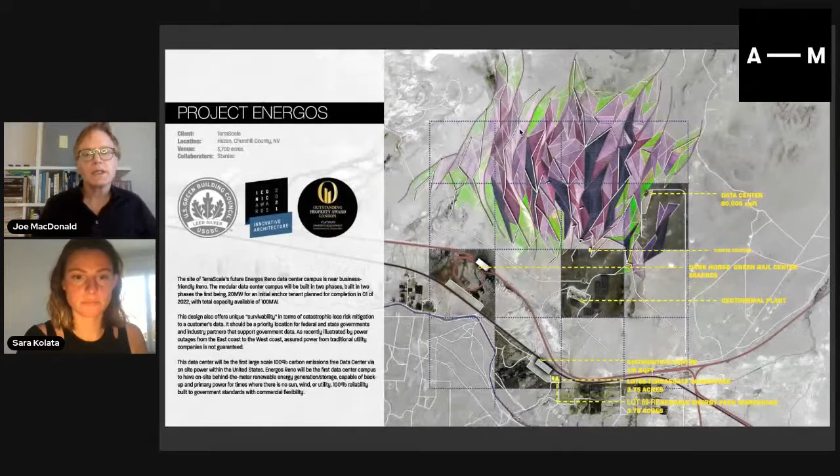So here we're looking at the site. It is in the desert, and there are several components to this project, Project Energos. The client is a clean energy infrastructure team called TerraScale, based in Los Angeles. And this project is about a year old, and it still remains at a concept level. But it's fairly comprehensive in that all of the buildings I'm going to show you are carbon neutral.

Now, one of the buildings, the next slide that I will show you, is a data center, and I can talk a little bit more about that. I just want to identify that this project by TerraScale has won 3 international awards. It won the Opal Award, the Outstanding Property Award in London, Platinum. It won an Iconic Award for Innovation, Sustainability. And just most recently, it won the Novum Award in Helsinki.

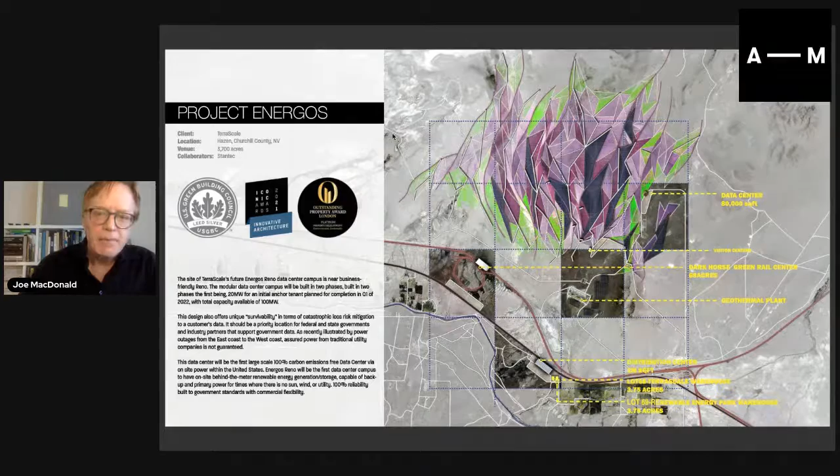So you can see the landscape that we're working with here. The next slide is the data center, and it's actually this building that won the 3 awards.

What you begin to see here on the skin of the building is our research into several different types of concrete, low carbon concrete, aerated concrete, and green walls. You can also see a solar array on the roof.

Now, to get a data center to carbon neutral, there are a few ways to do this. One is hybrid energy. In this case, there's a massive solar array on site combined with geothermal.

Data centers have an intensive water use, and so the use of backup batteries is very helpful. You can also have a wastewater treatment plant on site to recycle the water being used within the data center. The reason data centers are so intensive with their water use is because, of course, they're very hot inside.

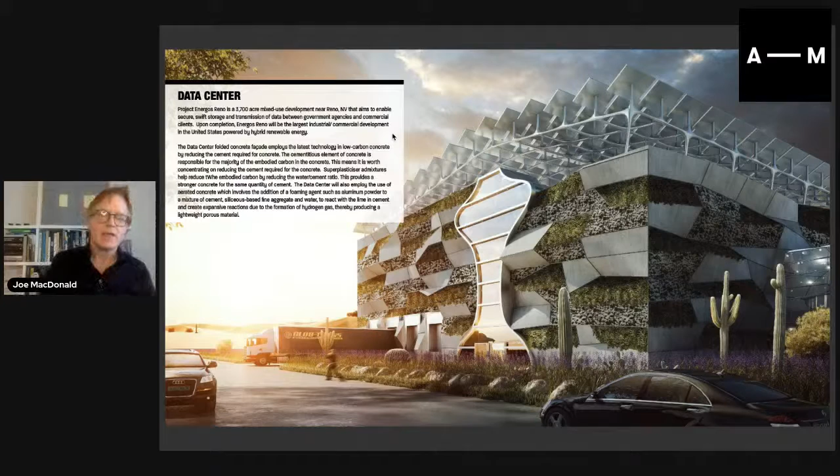They're full of data racks. They need to be air conditioned 24/7. They have redundancy factors and cybersecurity needs. Oftentimes they're built into mountainsides like this one, or completely underground, and most recently they've also been built on floating barges.

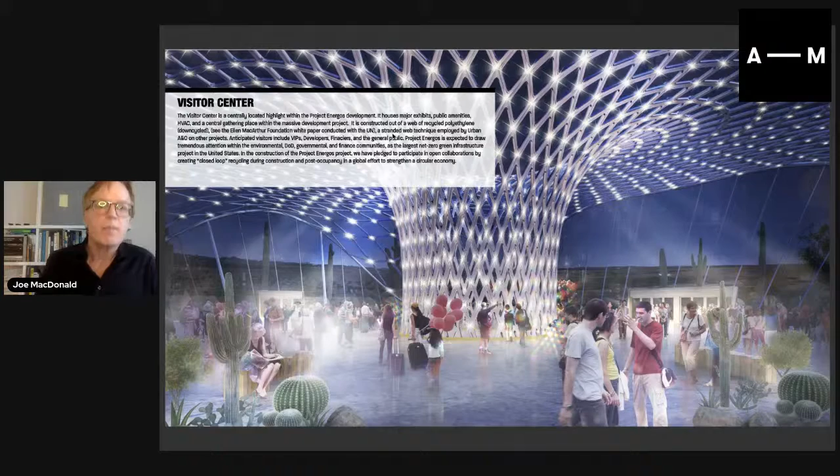Again, part of Project Energos was a series of carbon neutral buildings. In this case, the visitor center is built out of polyethylene.

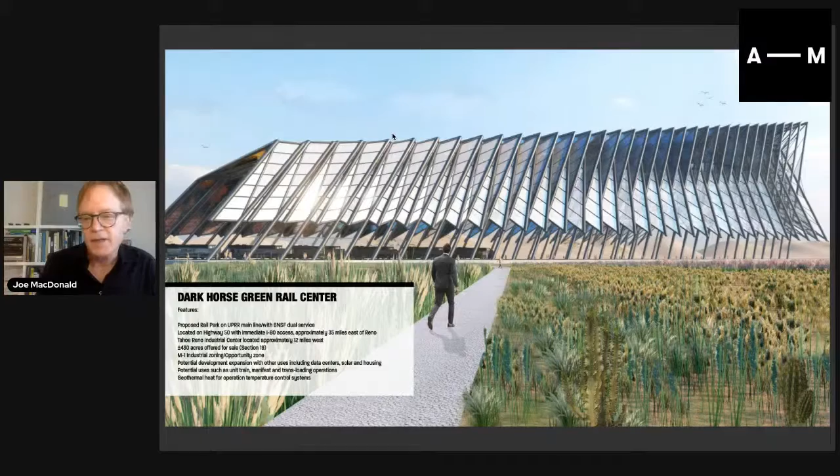On site is also the Dark Horse Rail Center, where goods and services will be brought to the site. It is made out of recycled aluminum.

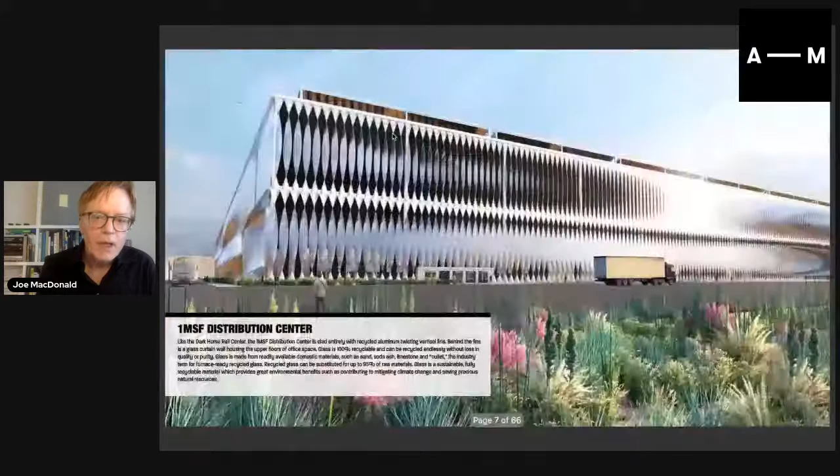And then there's a series of warehouses. Here's a 1 million square foot warehouse.

What we realized during COVID was that companies like Amazon just took off with delivery of goods and services. Forecasters now believe we will never return to conditions prior to COVID. The idea of warehouses is popping up all across America, and they are being used for transit stations for the movement of goods and services across the US.

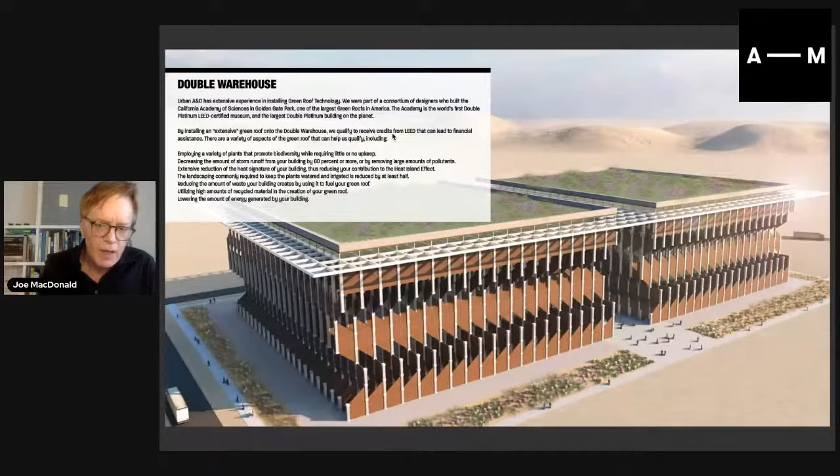This is another warehouse. We call it the double warehouse. It's made out of CLT, cross-laminated timber, which has the strength of steel. And you can see on top of the double warehouse the green roofs.

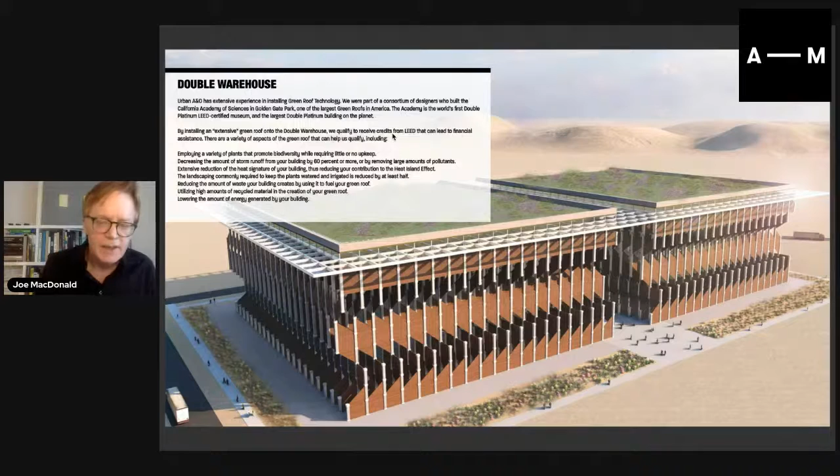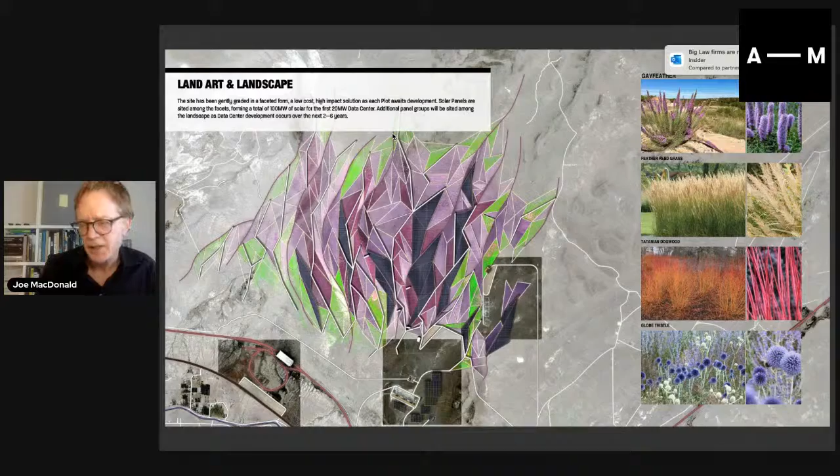We'll go into that a little bit more in the R&D deck. I just want to give you some idea about the design work of Project Energos. This is the last slide, where we also are very much focused on indigenous landscape solutions. So, of course, here we're working with an arid landscape.

And then quickly, we'll just move to the R&D deck. We always start every project with R&D.

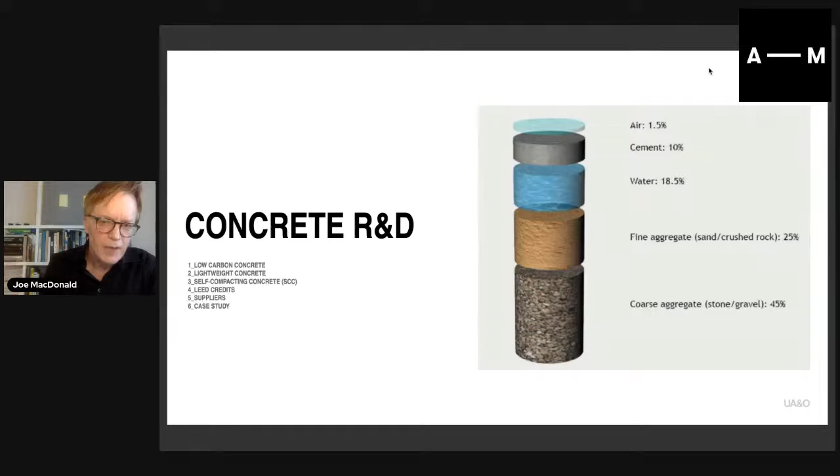For example, when we look at concrete, which is, of course, one of the worst emitters worldwide of carbon dioxide, we're looking for new solutions while still using concrete because of its strength, but trying to reduce the carbon footprint. Here's a great example of how we do that.

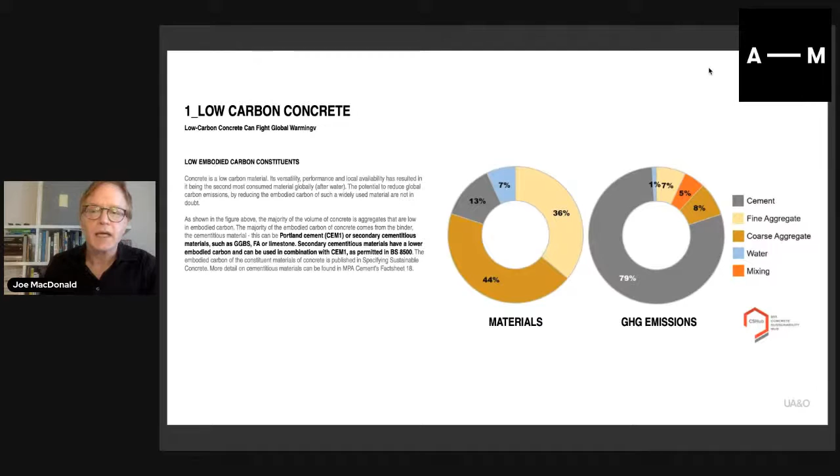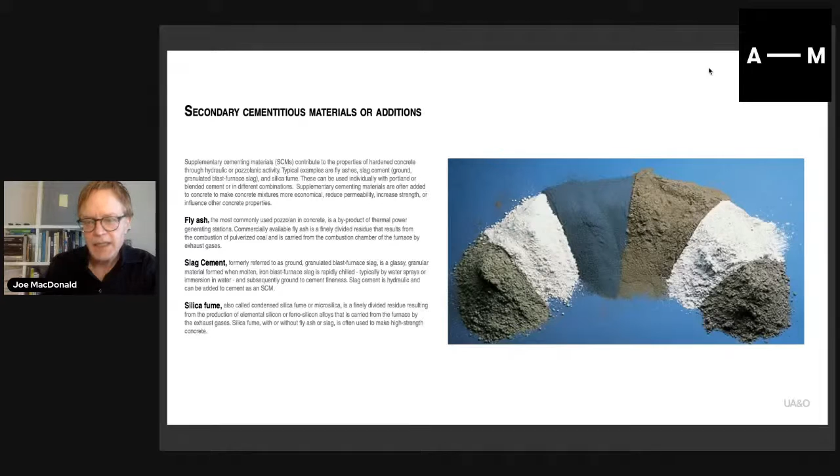We tried to almost eliminate cement from 79% down to 13% within the mix, and we increase agents like fine and coarse aggregates. We're also looking at secondary cementitious materials or additions. These assist in reducing, again, this cement.

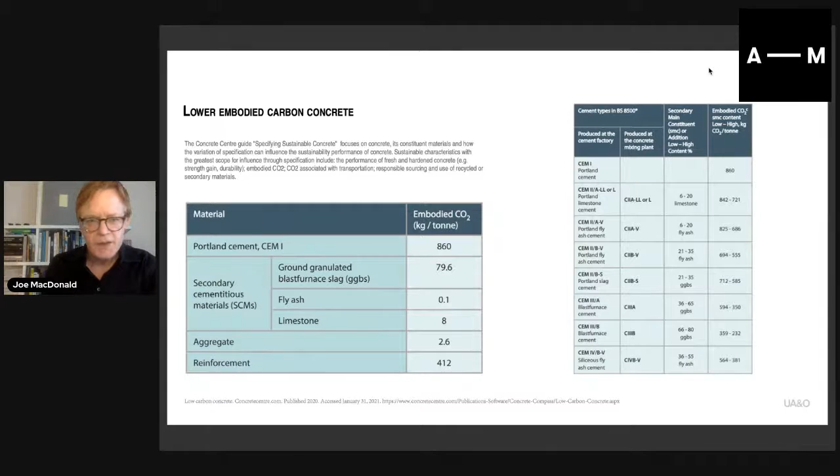And of course, what goes along with all of this are a series of calculations, equations, graphs, charts, and projections. We use various software modeling tools to reduce the carbon footprint of the buildings.

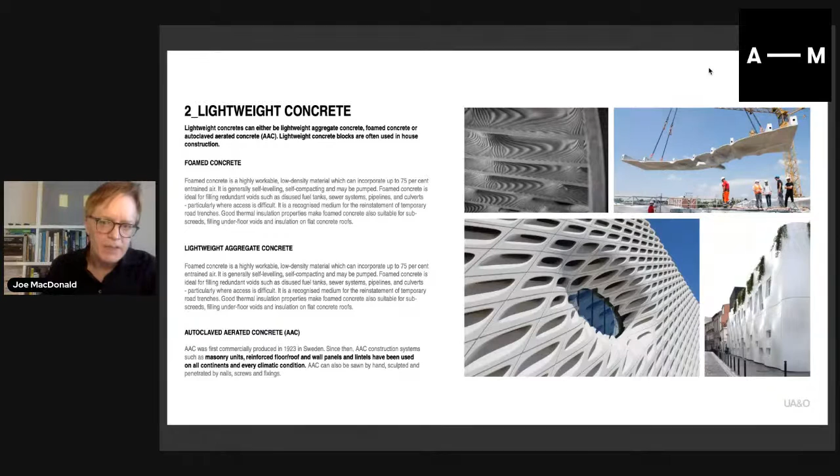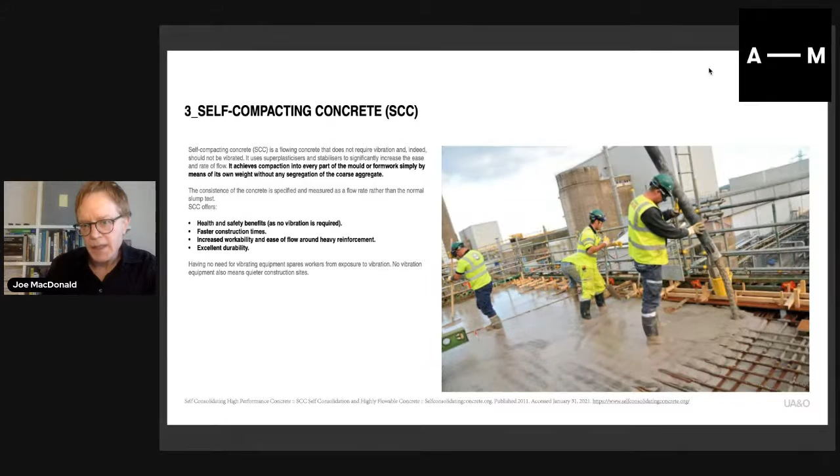On the horizon are some very exciting new materials like lightweight concrete, autoclaved aerated concrete, and self-compacting concrete, which has an intense strength to it.

And then, of course, we are always critically evaluating, yet incorporating, rating agencies such as LEED, BREEAM, and WELL.

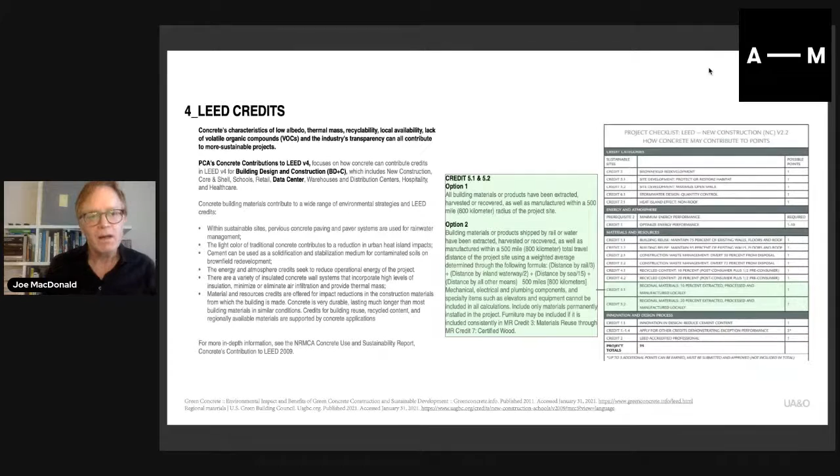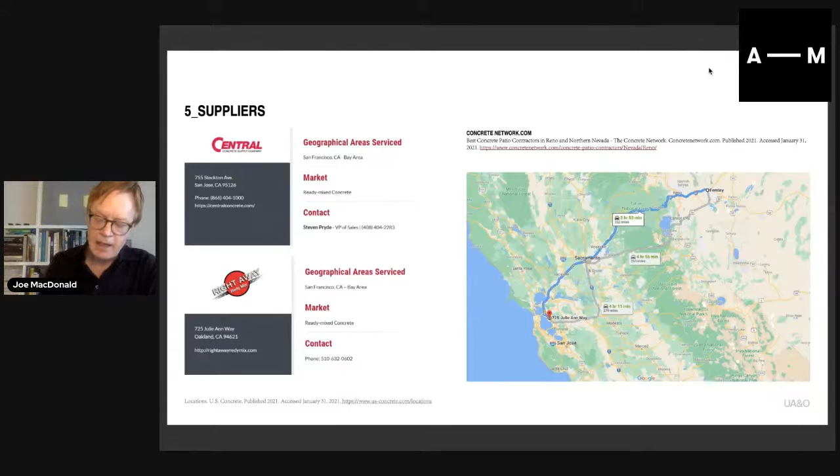For another important point, what you're seeing here relates to that project in Nevada. Sourcing material becomes a big issue. So if you are trucking source material across the country, that is not the solution we're looking for. We're looking for locally sourced materials.

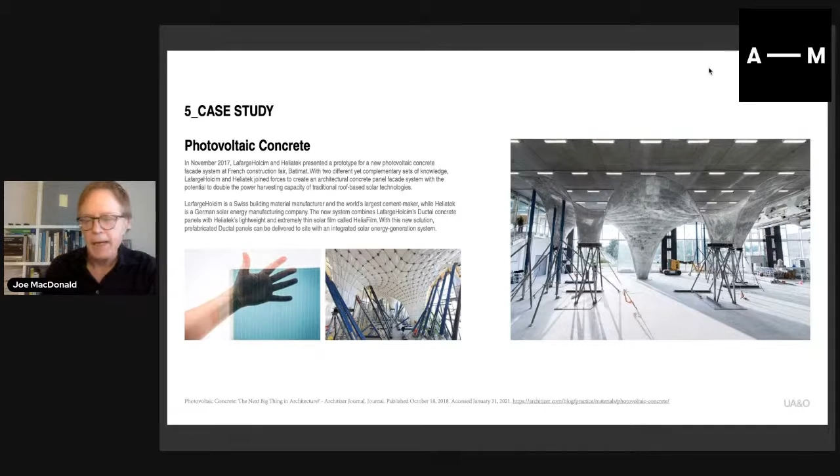This is just one last very experimental product called photovoltaic concrete, still very much within the labs of universities like MIT, still undergoing tests. These are the innovators on the concrete landscape.

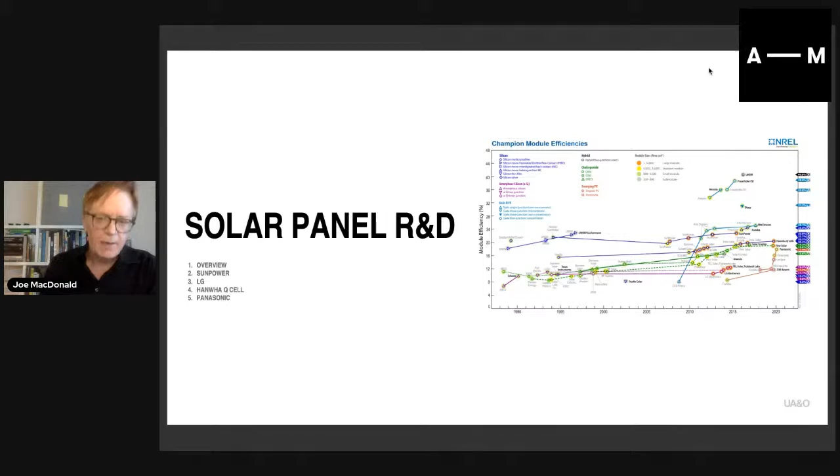And then, of course, solar. We can fly through this, but when we introduce solar into a project, we have to, of course, balance performance with cost.

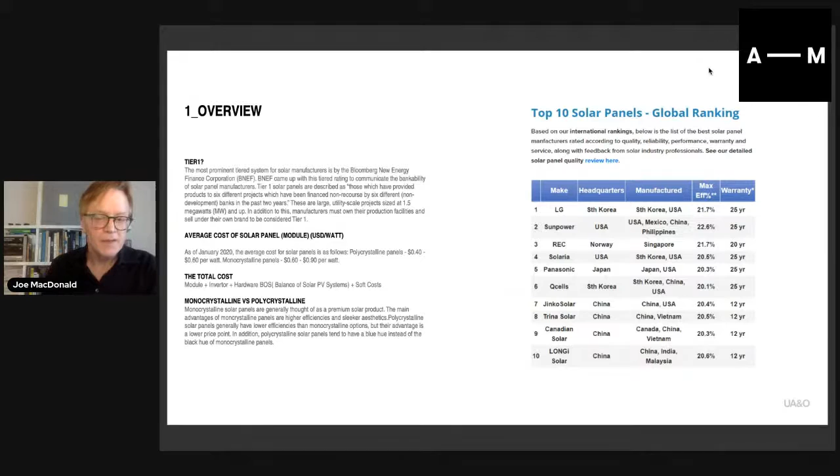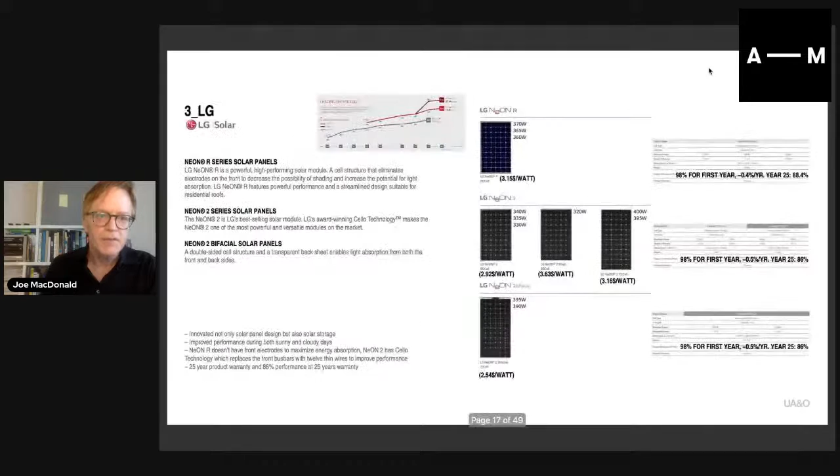This is just an overview of the presentation we made to the client about how we can do that, and then ultimately what we recommend. These are just various manufacturers of solar.

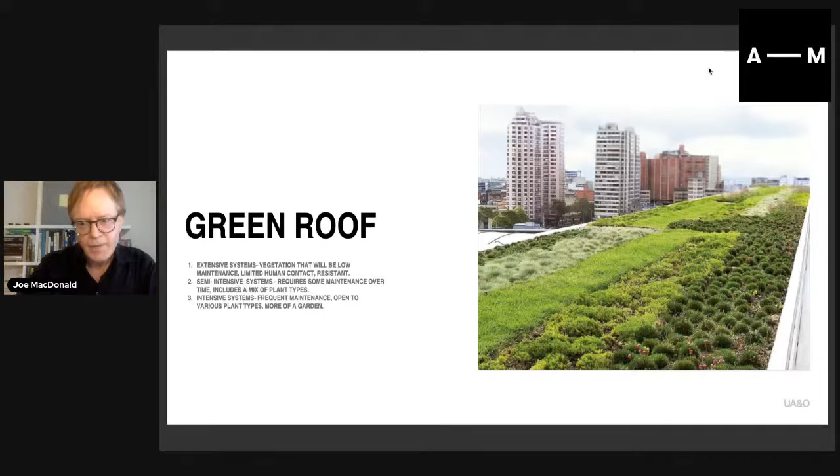When it comes to green roof technology, I was involved with a project, the California Academy of Sciences, under the design directorship of Renzo Piano. California Academy of Sciences has the largest green roof in the world. Cal Academy is also the first and only double platinum LEED building in the world, and that was from 2008.

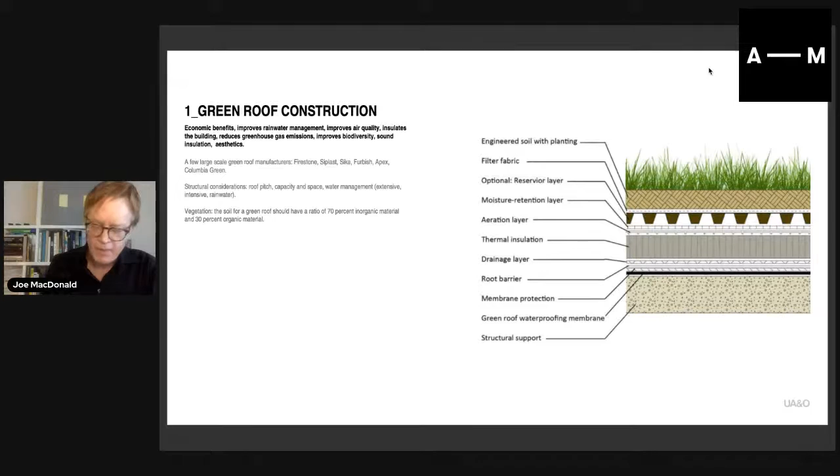I'm going to show you the section of a green roof. There's a common misperception about green roofs: no, you cannot walk on them. The plant material is far too delicate, and the soil depths have to be very shallow because of the weight. These are just some of our construction details, showing how complicated it is to design and build a green roof.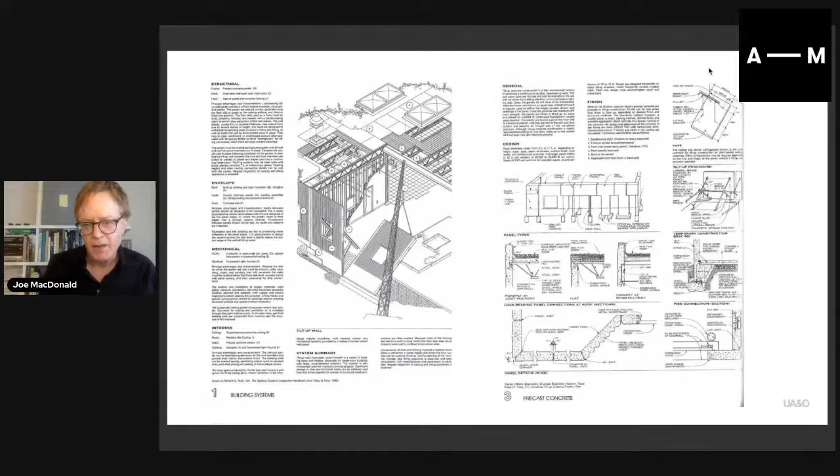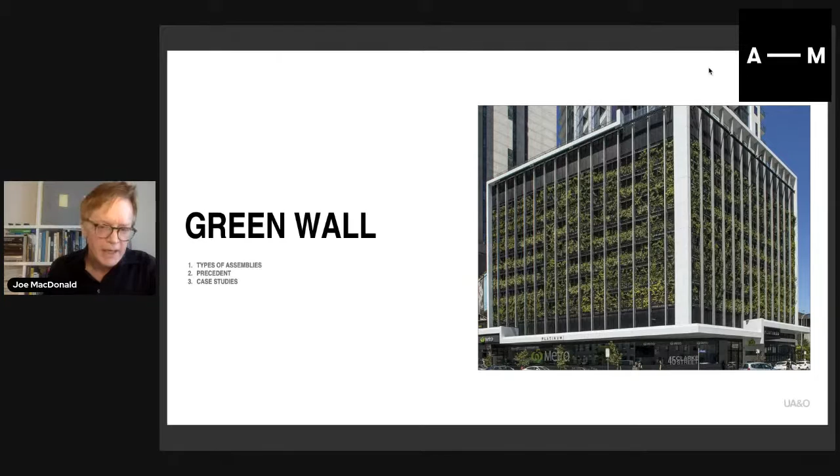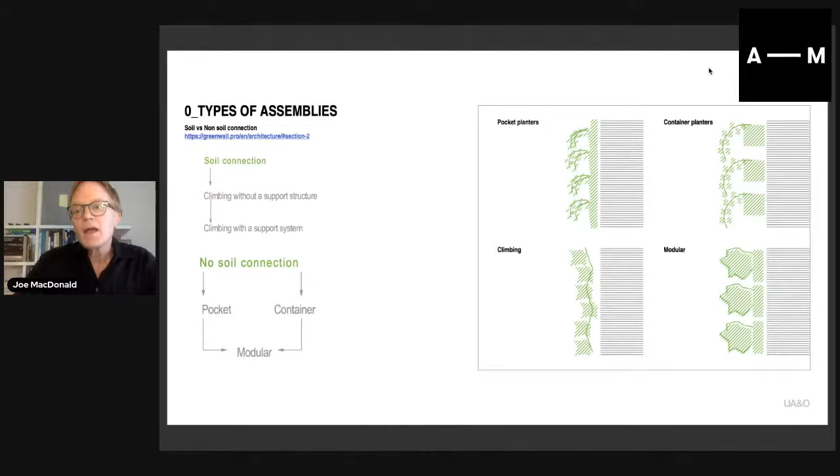And then finally, we go to green walls. I showed you that on the data center we have green wall applications, but there are many types of applications. Here we identify the four main ones: the pocket, climbing, container, and modular. I'll give you examples of all of them.

So here's a modular system. Of course, the maintenance occurs on the outside of the building through a forklift.

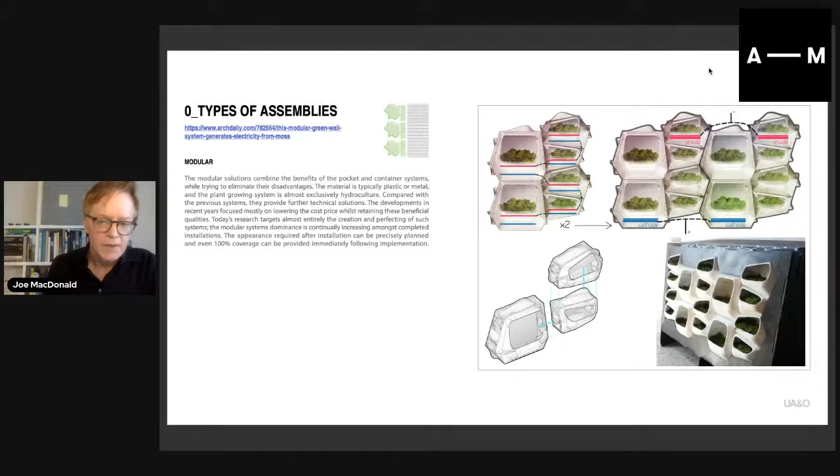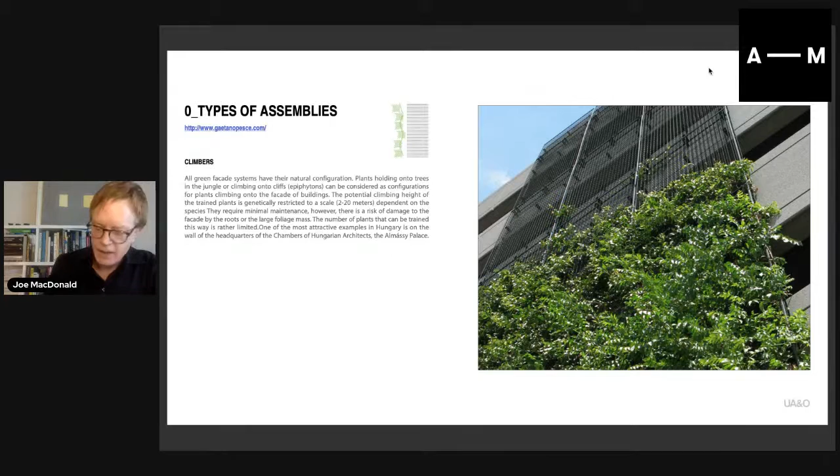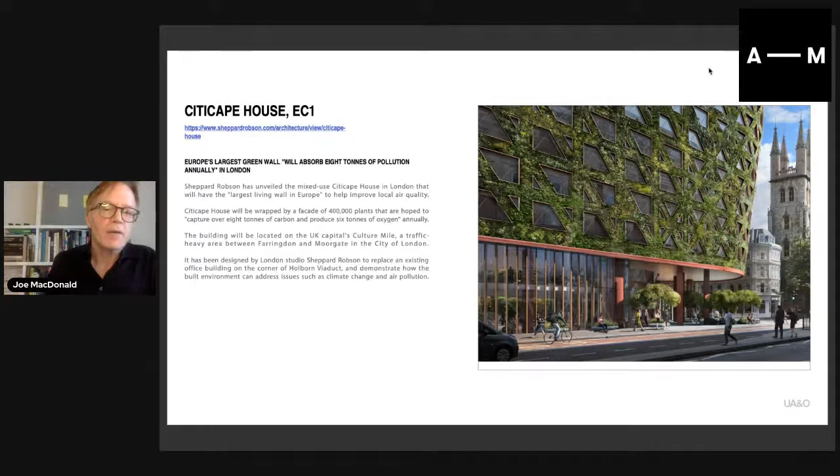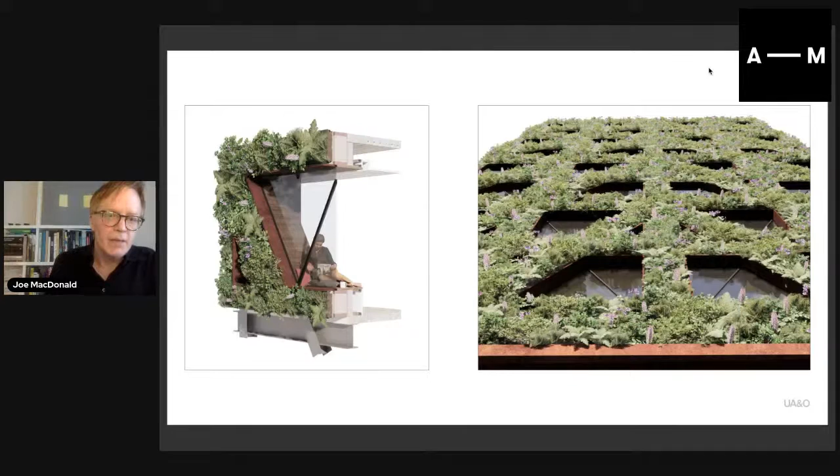This is a very interesting project, not by us. This is the largest green wall in Europe, and it's in London. You can see here that it will absorb 8 tons of pollution annually. Also very well incorporated into the program and the facade of the building. Here you see the scale of the project.

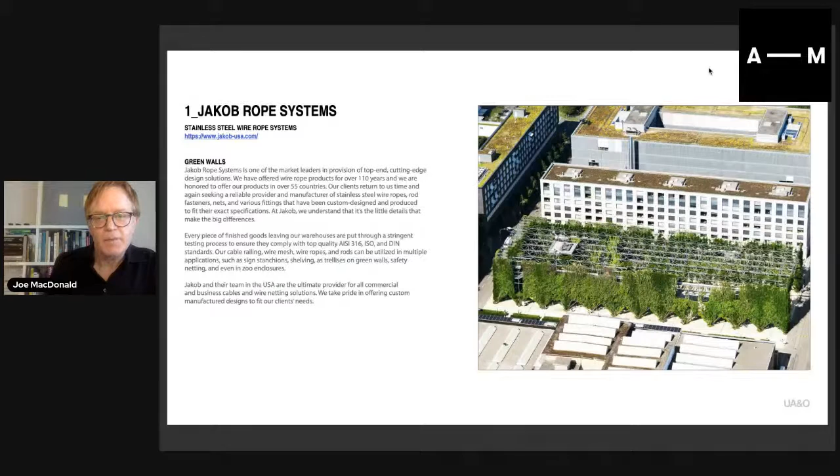And yet just another system called the Jakob rope. These are prefab units that are just brought to the site and tilted up.

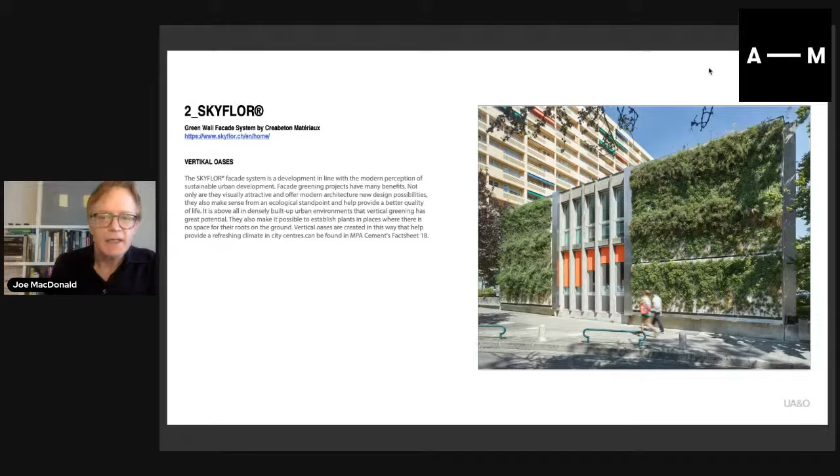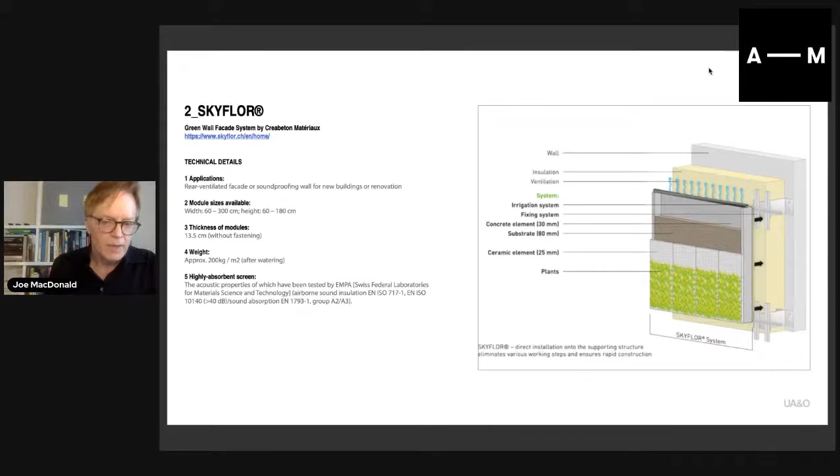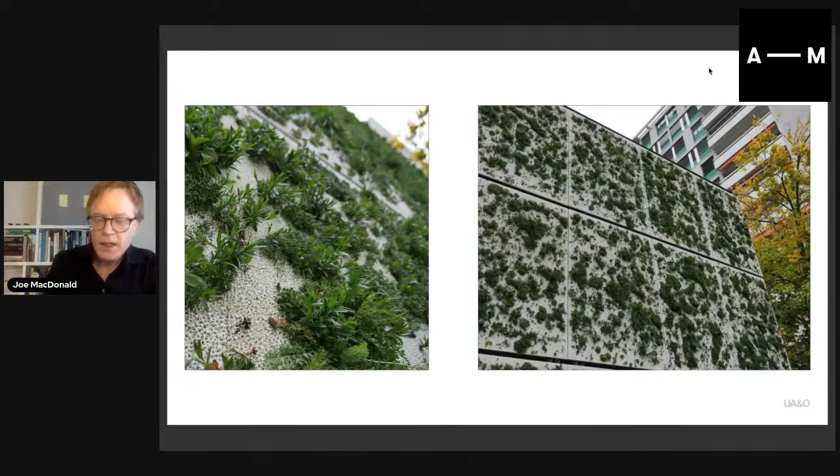So what we're trying to offer the client is a range of solutions with a wide range of associated costs. This is the one that we used on the Nevada data center. It's aerated concrete where the plant material actually grows out of the concrete, out of very small soil beds.

Another prefab solution—specifications, details.

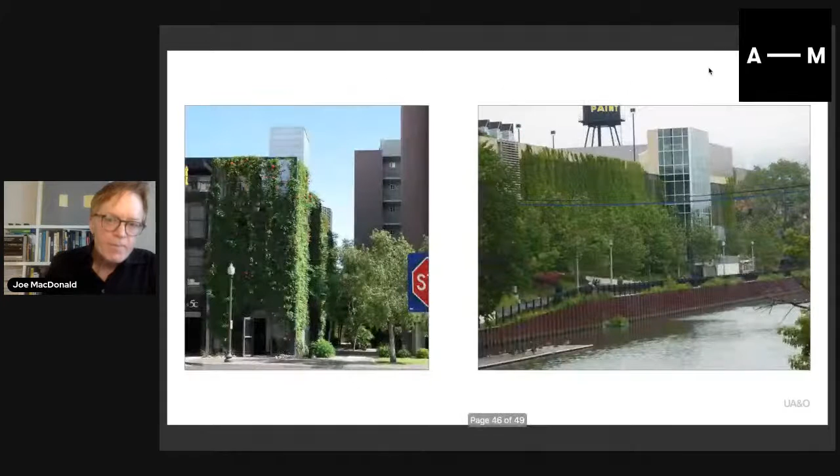And then we're just going to wrap up with another great product, because of course everybody knows the amount of asphalt, at least in this country, that covers our ground planes. And if we're going to do that, there's a way that we can do that responsibly, and that is through rubberized asphalt, where ground up used tires become part of the asphalt mix.

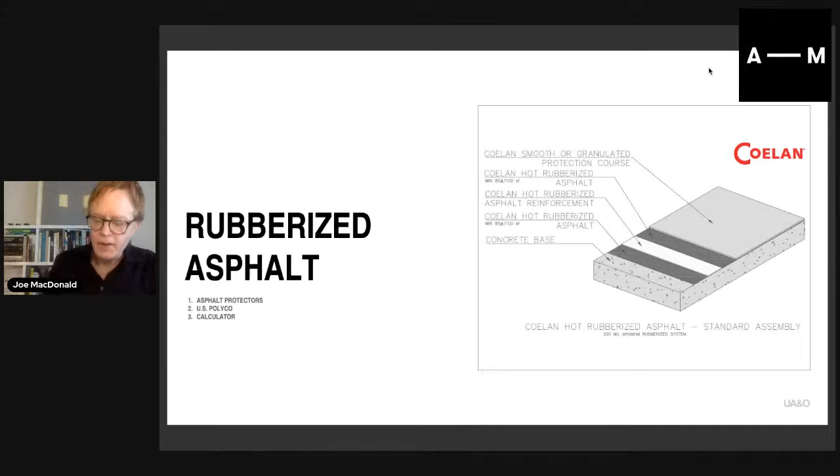And I believe that's the last slide. So I will stop sharing. Yes.